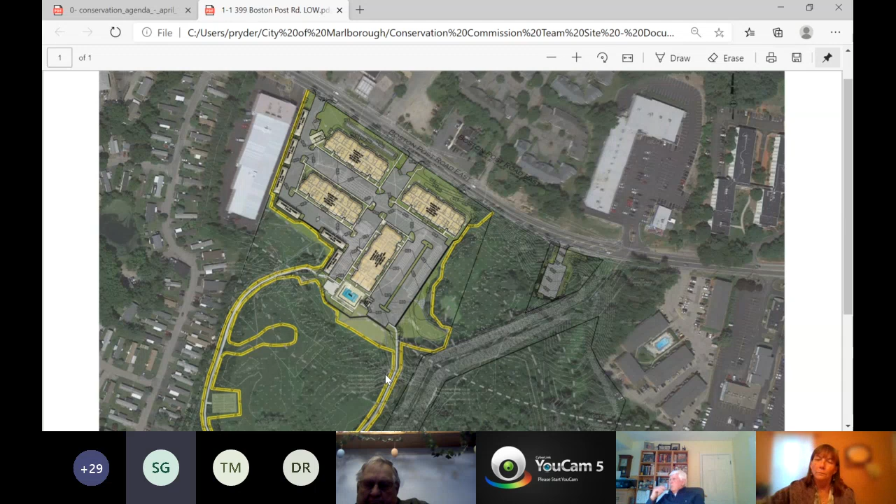What we've done for that ring, I'll just jump to that now because I want to keep this presentation brief. That ring is proposing to stay in place as a redevelopment of that pathway. It's currently about 8 to 10 feet wide, and we're proposing to take that portion of the project, classify it as riverfront area redevelopment, narrow the width to 5 feet wide so that we're taking the total impacted degraded surface of that cart path and narrowing it to 5 feet wide, paving it for pedestrian access, and then revegetating the shoulders so that we're having a reduction in overall degraded surface in the riverfront area, both the inner and outer riparian zone.

The balance of the project under the riverfront area standards is being classified as new development. The reason we're doing it that way is to take advantage of the opportunity the regulations allow for 10% maximum alteration of the riverfront area.

Currently, there are portions of the site that are degraded and previously developed. We measured just shy of 1 acre of the site of McGee Farm that has graveled paddocks, parking areas, buildings, etc., that are not vegetated and don't have natural soil on them. We're not counting the existing paddocks as degraded, although we're recognizing that they are utilized in a non-natural way as paddocks, but those don't count toward the previously degraded area.

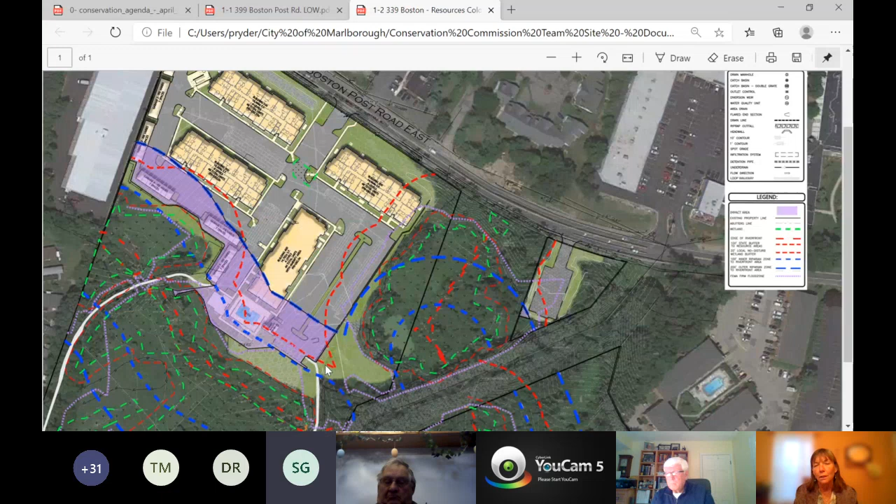This is Priscilla, and my comment is simply that, for anybody who's listening, when you're filling in the wetland here, it's kind of like if you fill up the bathtub, you have to create an equal or larger bathtub so that water can flow into it. So that's what's being proposed.

The other thing I wanted to note was that the engineering department and I are still reviewing those calculations, and we haven't finalized that review yet. So we'll report at the next meeting.

Okay, and a little thing about the replication area. The replication area is over on the other side of the track. And I think it's 7,287 square feet.

What's the loss of wetland area? Well, the only loss is the isolated wetland, not any BVW, and it's a small number. Let me grab it - I want to say it's about 1,500 square feet, something like that.

It's down where the cursor is right now - I think that's where you're planning on putting it, right in there. It's actually a little bit higher. If you see, there's a little silt fence loop a little bit higher - you can see the little black silt fence there, right in the middle. So there's some access there, and then it's kind of in a pocket of wetlands.

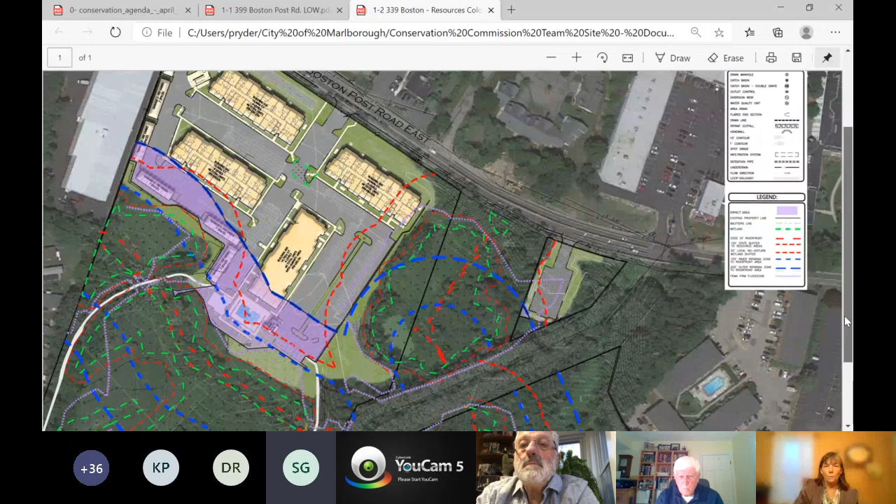Tell me where the bocce court area is. If Priscilla can point to it, it's just below the pool. Yep, right there. Could you point out on the map where the dog park would go? Priscilla would have to change the map, I think, to the one we had previously. Okay, I can do that, let me try.

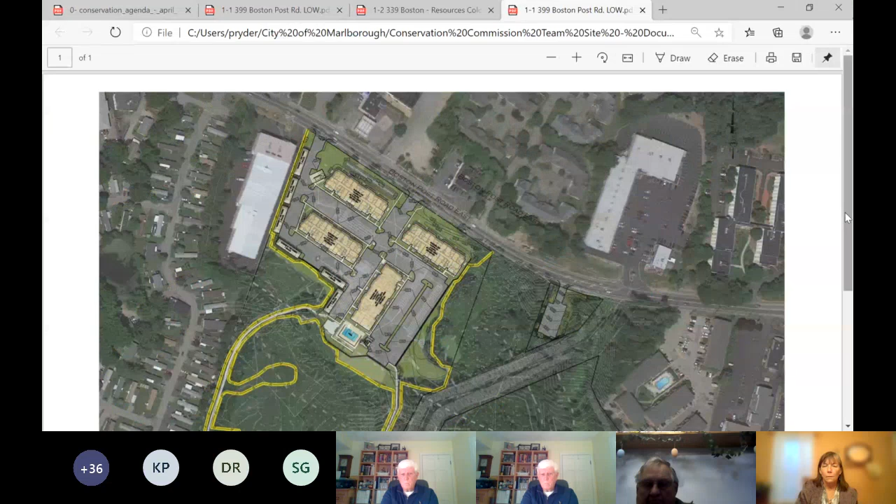All the way to the southwest corner, this is the dog park, that's correct. And this is the community garden. Correct. And while you have that up, the other little projection to the right is the wet replication area we were discussing earlier. Okay, I see it.

There is a concern about the dog park. Yeah, that's why I brought it up, the letter from the DCR. But I think they've addressed it because it's as far away from the stream as they possibly could get. That was their big concern. There is a wetland here, so we'll have to figure out what the distance is. They were trying to get it as far as 100 feet away from whatever the resource areas are. We'll have to, I'll read those comments in a bit too.

Okay, great. Thank you. Any other members of the commission? Yeah, I got one more to add into that dog activity. I'd like to also see a little bit more concentration and report back to the commission on the disposal of the dog waste, how they're going to take care of that situation. That's if it's allowed, Alan. That's okay. I mean, that's a good idea to give feedback.

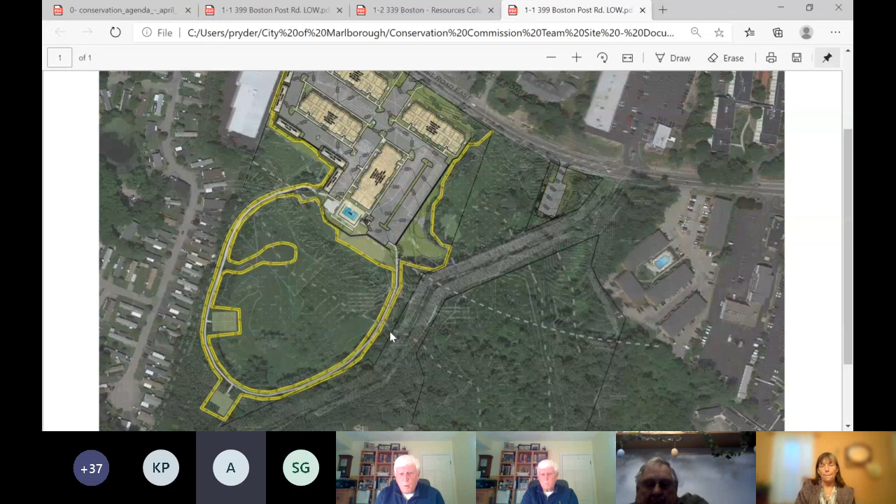Okay, any other members? Yes, Mr. Chairman, Dennis, go ahead. Yeah, I reiterate, like we had discussed before, that satellite parking area and access to it. I know they're counting on the state. He did say they may have to put their own sidewalk in, and what I found out, the state, I think they're lucky if they even get out there by 2022. So they're going to have to do something on their own to get to that parking area, or it ain't going to fly. And the same with the dog park area. It's kind of a negative thing, really, in my book, as far as I'm concerned.

Exactly, and again back to what Alan was talking about, he didn't really bring it up, he asked about a profile of that area, what's in there. Over the years, when they had operated as an animal farm, they buried a few cadavers in there. There were never horse cadavers, just to be clear. Well, not just horse, or animal, right? Animal cadavers, and there was never a selected point, it was just either here or there, about just where they keeled over. So there's going to be a lot of that in there.

Yeah, I agree Dennis, that's a very good point to be presented here tonight. Thank you. So that's about what I have to say, and I think it's overbuilding a small area, sticking a lot in a small hole. My comment. Thank you.

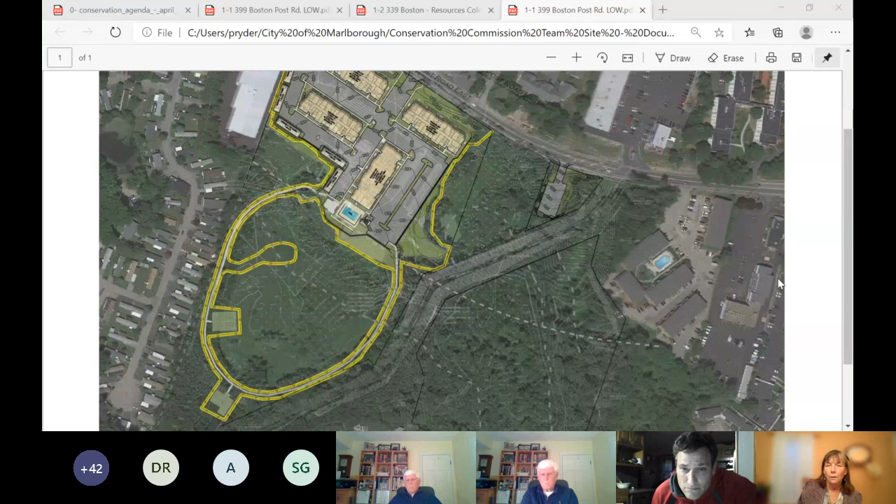I am abutter on Helen Drive. Priscilla, can you move the map up towards the bottom so we can see the back of the houses on Helen Drive, please? I'm going to see if this map shows that. It doesn't go that far, but here's Helen Drive, where my cursor is, and I think you guys are down, I don't know if you're this corner or down a little bit further. I'm down a little further from where you are pointing.

However, I want to make sure the commission remembers that Meadowbrook is a stormwater run, and that any change in the floodplain is going to flood a number of backyards on Helen Drive.

Okay, and I think one of the things we have to look at is they're supposed to be providing some compensation so that water can't go flying through, that it has to stay in the flood zone. But that's a good point, and we will take it into consideration.

As we go, because since the surveyors have been out there, we've gotten into the wet season, and now a lot of that land back there is now marsh, which they wouldn't have seen when they were walking through earlier because it was frozen ground.

Correct. And if you'll notice where the flags are is probably the extent of the water. It might be a little higher because we've had a lot of rain, but the edge of the wetland is usually the extent of flooding in some cases.

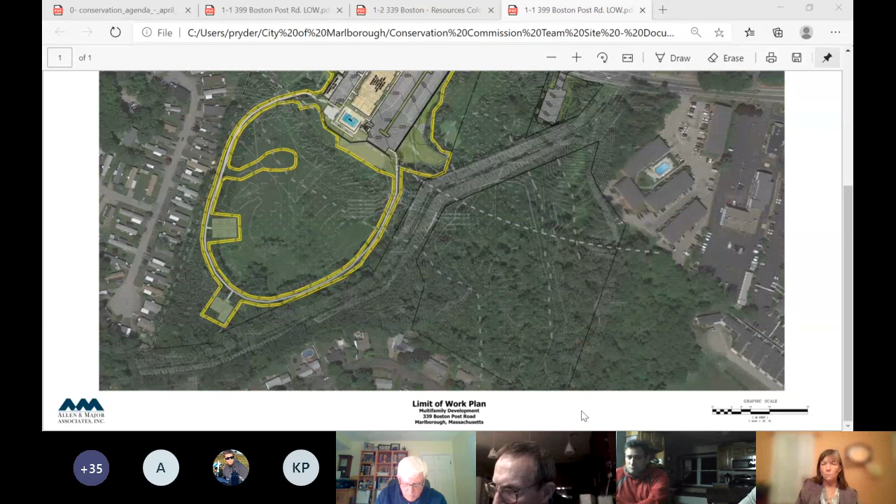Okay, going on to the next item on the agenda. This is a notice of intent for a continuation of a public hearing: McGuire Goddard Consulting, Red Spring Road, James Moran, Libby Levinson, proposing to replace the existing single-family home and upgrade the septic system next to Fort Meadow Reservoir.

Okay, who's here to speak on that? Who's here to speak on Red Spring Road?

Hi, I'm Jim, Jim Moran. Hi, Jim. Okay, so Jim, we're getting a lot of feedback.

So if you're on, are you on a phone or on the computer? I'm trying to be on both. Okay, then you have to mute your computer so we can hear you on the phone. It's feeding back, Jim. Yeah, I'll shut down the computer. You don't have to do that, you don't have to shut it down, you can just mute it.

Can you hear me, Priscilla? That's good, nice and clear. Thank you, all right, sorry about that.

Jim, why don't you go ahead and make the presentation, and I can point at whatever you need. Priscilla, I don't see the screen, the plan doesn't show a map on mine. It doesn't show? Okay, hold on, I have to do this in step 2. I have to close it and open it again. There you go, okay.

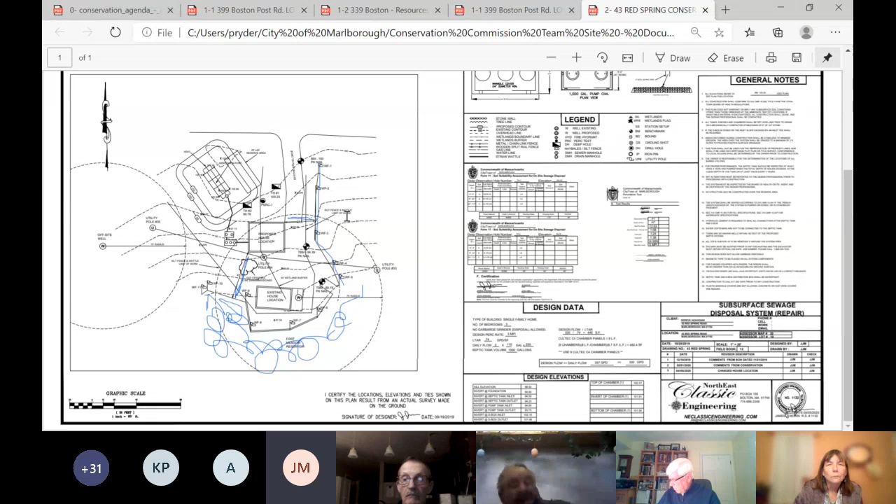If you look at it from the street, the far right side of the home, you got elevation 98. So the top of sill is 98.5. So you're going to sit 6 inches out of the grade there, and then you come in the back. That's not, the 98.5 is not on our plans. We don't have any solid floor elevation, top of concrete, nothing. We don't have that on our plan.

Jim, can you see the plan that I'm showing on the screen? Yeah, maybe. You have a different plan? Because if you have a better plan, then that's what we're looking for. No, I don't. It's not there. I know, between talking to the home designer and all that, I knew where the elevations had to be. I didn't know that the conservation wanted to see them.

So yeah, I think we want to see a plan that's similar to what you would give to the building department, and there's probably some fine grades around the edge, so if there are some grades you have to chase to make things smoother, that's what we want to see too, just because we want to see how much work you have to do. Right, the idea was to use the foundation and just grade into the foundation those existing contours. Okay, you're trying to get out of doing some work.

You've got to do a plot plan that you're going to submit for a permit, not for a septic. You've got a plan for a septic permit now. We want a plan for a house permit that we see. I will ask the building department what they need as far as a plan goes, and I'll make sure we have that. Yep, that's a good idea, that's usually what we do, so that would be great. I'm looking at the plan that we have, and it's a septic plan.

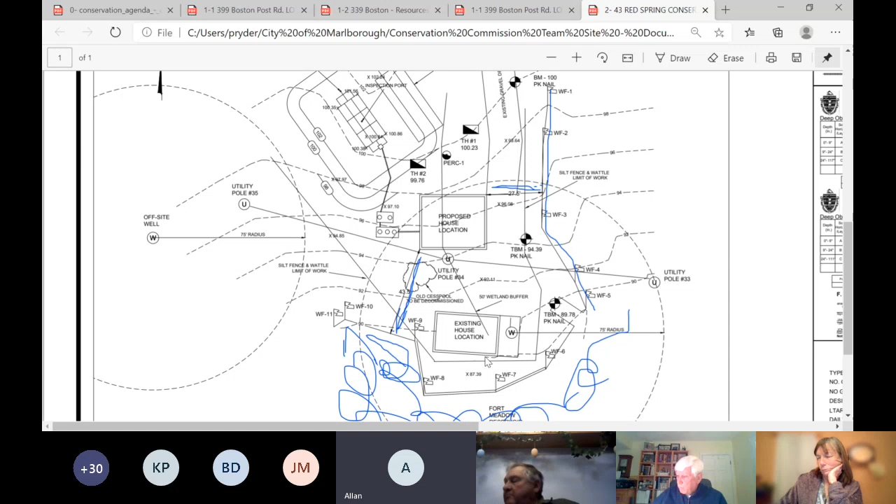I'd like to speak and pick up where Dennis left off with the well situation. Isn't it a requirement before you can have an occupancy permit, even before the house is constructed, to have a certified water supply, such as a certified well approved for the occupancy permit, or connect to the municipal water supply? Isn't that the procedure? Yes, that's what I was talking about earlier. Even to get your building permit, you need a means of water and sewer, and it's got to be an attested well or connection point to the municipal water supply before the building department will even issue a building permit.

And then they usually retest the well.

As far as I'm concerned, and the rest of the board, at this particular time we're going to have to wait until all of those reports are in before us before we could make a decision for you.

It could be contingent for the building permit. We can develop an order of conditions, Alan, and there could be a contingency before the building permit is issued.

Correct. Anyone else?

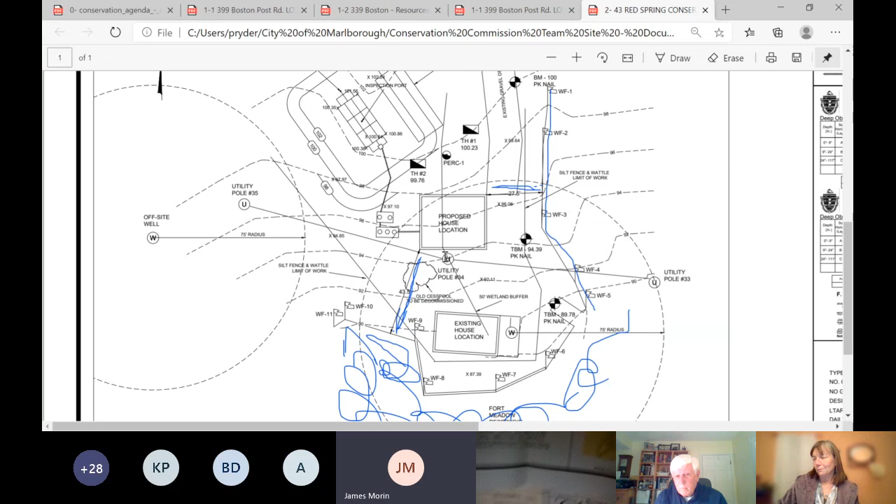Well, there's one other thing. This is out of our purview, but looking at this, it looks like there's going to be a telephone pole about two steps out the front door. What's going to happen with that? The long-term plan is to work with National Grid - they did a crazy cross-country run many years ago through that property. The idea would be to install 2 new poles at the road's edge and walk the wire from utility pole 33 up to the front over to utility pole 35.

That'd be something that should be included on the plot plan, submitted to us for approval. It wasn't due to financial considerations here, and it wasn't going to be done right away. It was going to be a long-term plan where the property owner would come back to do that.

So the good thing, Jim, would be to put that on the plan. The permit's good for 3 years. It could be a condition that continues or something. That might be a good idea. Okay, since you're kind of crossing the wetland there and you're close.

One more question I can ask on that. When you're referring to property owner or homeowner - is it one and the same? There is a home there, but it's not habitable. What I'm trying to say is, the landowner is the Morse Family Trust. I mean, are they the ones who are going to relocate the pole, or is the homeowner?

The homeowner would. Everything is borne by the homeowner on this project. As you said, they lease the land, so all improvements are supervised by the landowner and paid by the homeowner.

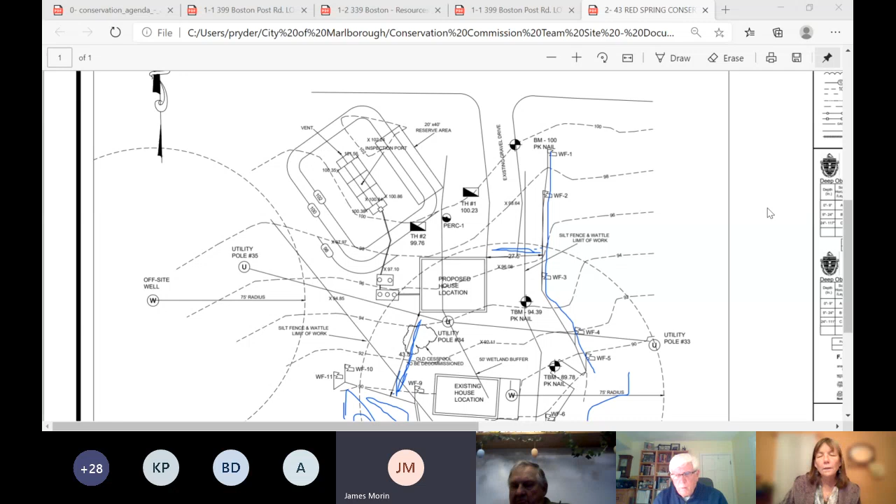And then the last thing is the grading when you're taking out the old building — the grading that will be at the end, so what that final grade will look like after that building's gone.

Hey Jim, just another point — when it goes along, all you have is a square box for the house location. If you're going to have any decks on the front, side, or back, those should be shown on the plan.

Okay, yeah, I think there's a deck on the second story which doesn't touch the ground — do you still want to see that? Not necessarily, if it's a cantilever deck or something like that. I'll take another look at the plan, but I'll show all decks with the grading, anything that touches the ground.

Okay, and I don't know if there's any public out there interested in making comment on this one. I'm just scanning the list to see if there's anybody not part of this. If you're interested in making a comment, you can unmute yourself, but there doesn't seem to be anybody unmuted, so I think we're good for right now.

Can I say one more thing? Sure. I apologize, Dennis — the driveway, you're going to show it. It's presently unpaved. In this plan, are you going to show it as unpaved? And if there's any intent to ever pave this, we have to know, because it comes down to watershed, non-pervious surface.

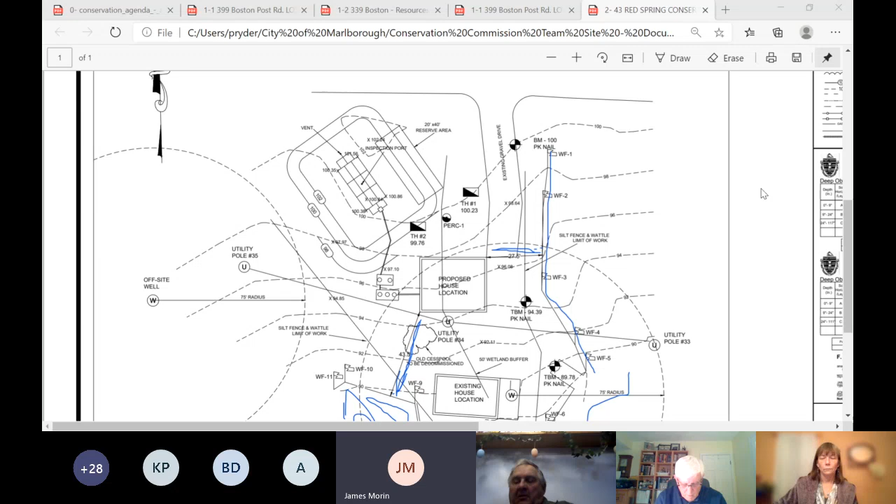Yes, I agree, I believe the intent is to leave the existing gravel driveway just the way it is, even in the future. That's fine, it's just that you note that on the plan. So I'll note this is to be used currently and in the future, and if it was to change, I'll note that they'll have to come back before the commission to even pave it.

Correct. I don't think there's an ounce of pavement off of Red Spring Road down there. Not that there is, yeah, no. There is, Billy Peters'. Oh yeah, that's right. Yeah, I know, I stand corrected. Thank you very much. I'm not trying to... okay.

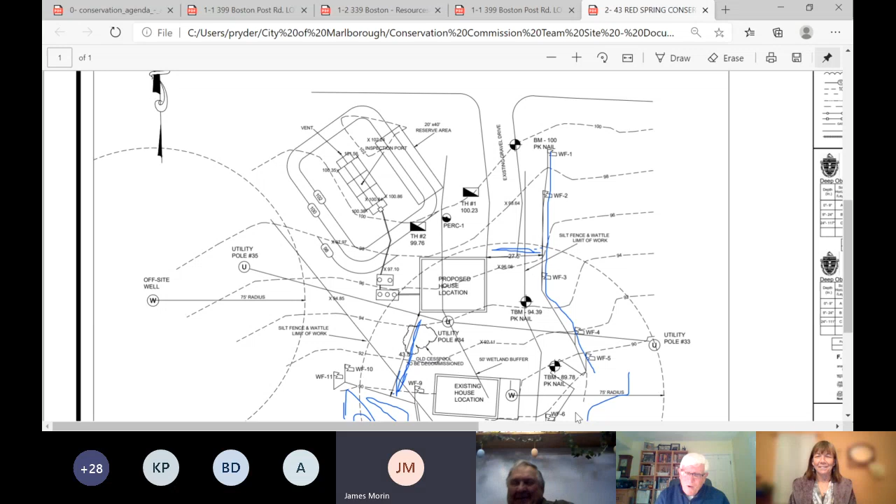Is there any other questions, members of the board? Okay, we're going to continue this to what date? Either May 7th or the 21st, Jim. I'll take the May 7th. Okay, yes, we'll put you back on for May 7th.

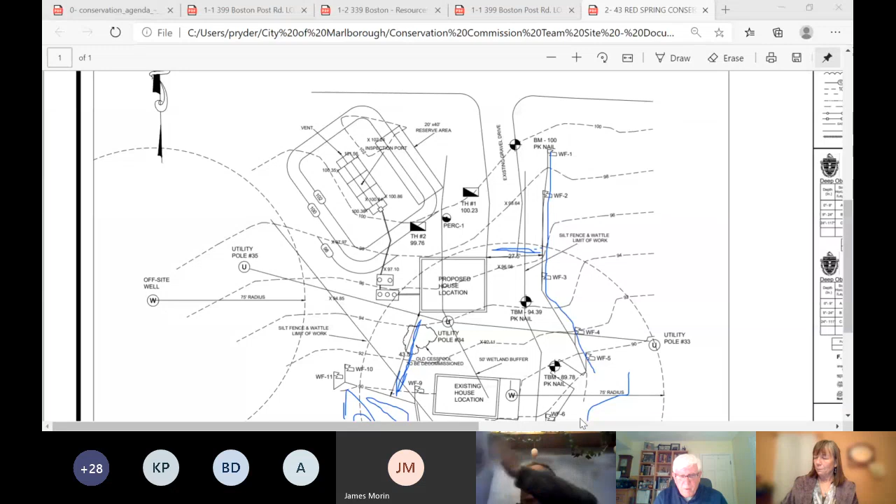So somebody out there requesting a continuance? Dennis, yes, I request a continuance. Okay, second. Motion made and seconded, call the roll.

Ed Clancy, yes. John Scarron, yes. Karen Paquin, yes. Dennis Demers, yes. William Dunbar, yes. David Williams, yes. Alan White, yes. Very good.

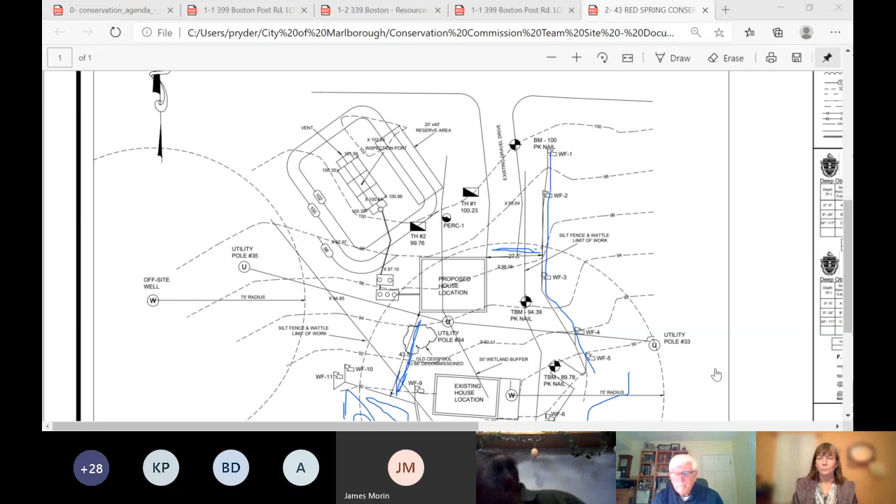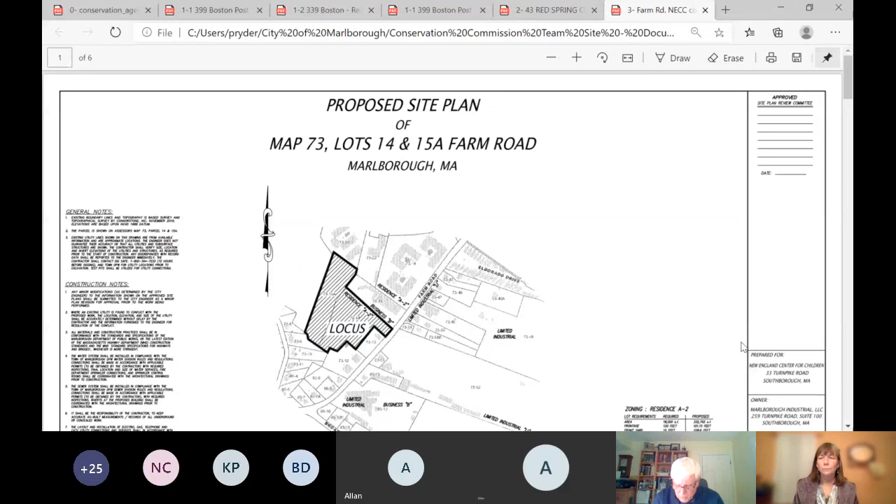Open the next hearing. This item on the agenda is a notice of intent for Farm Road, map 73, parcel 14 and 15A. Michael Downey, New England Center for Children Incorporated. The proposal is to construct a residential school building for the New England Center for Children with a footprint of 13,250 square feet. The proposal includes parking, drainage, and utilities as well. Some of the work is proposed within the buffer zone, to a wetland across the street from the old airport.

Is there anyone here to speak in the matter? Yes, this is Vito Colonna with Connorstone Engineering. Good evening. Please state what your project is.

I'm on the phone right now. The video wasn't quite working for me, so I think I can still do this. I should know enough of the plans. Right now, what it shows is the plan. It shows the plan, right?

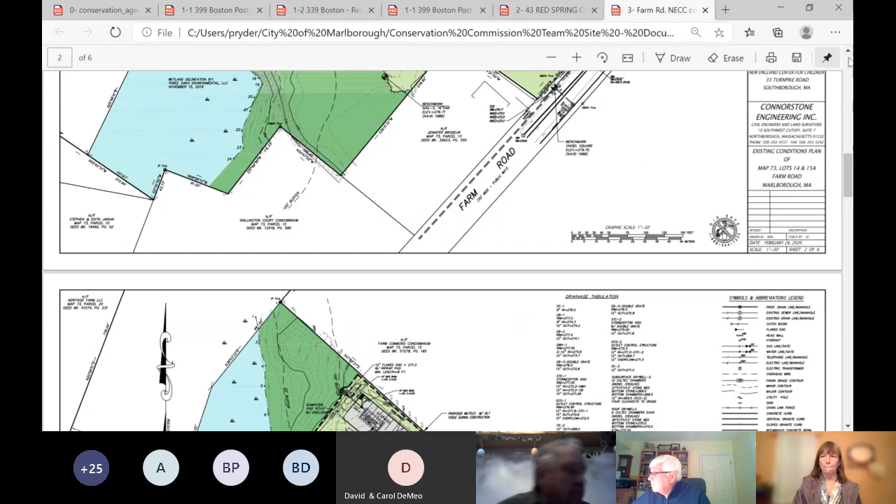Okay, so you want me to start going in, go over the project for everybody? Yeah, okay, go right ahead. Just want to see what's on the screen right now for everybody. Is that the existing conditions plan, is that what you want, Vito? I think it's sheet 2 in our set. Okay, yep, we can do that. Okay. All right, okay, all right.

So the existing site right now is 7.6 acres, and it's a vacant lot. It's right across the street from the old airport, where they're building that commercial development right now. So right now, the upper portion of the site is basically a field. That's that lighter green area shown. And then the rear.

Okay, so we're getting feedback from you. Do you have two items that are giving us voice? Are you on the phone too? That was Bill. Somebody named... oh, Bill, I just muted him. Okay, thanks. Yep, I just have the phone going.

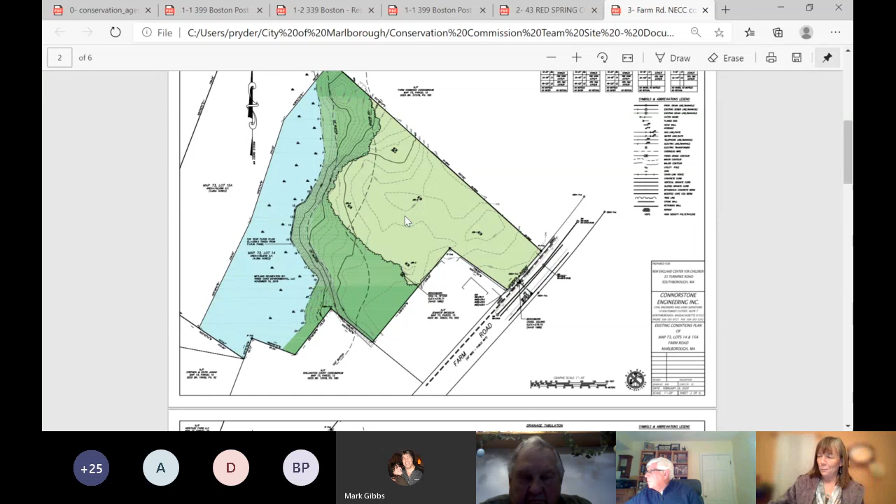Okay, go ahead. And then beyond the field, it's a fringe, kind of the wooded area in the back. It's that darker green area shown on the plan. And then it drops down approximately 10 feet in elevation down to the wetland in the rear. The wetland is fairly flat out there. It's clearly defined by the toe of slope. There is a floodplain associated with the wetland also, and the FEMA mapping shows that it basically correlates with that toe of slope. So we've shown all that on the plan right now.

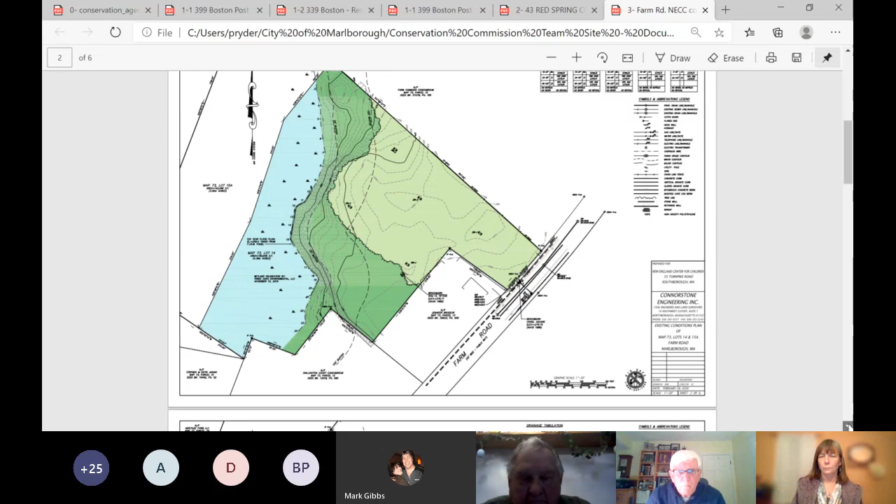So the upper portion, though, is fairly flat, and that's kind of where we're proposing most of the development, trying to keep mostly out of the buffer and in that previously cleared field area. If you want to switch to the next site plan sheet, which is sheet 3, you can kind of go through the site plan. Okay, there you go.

All right, okay. So the proposed building, it's that T shape in the middle, and it's proposed housing for New England Center for Children. It's a 27-bed facility, so there'll be 27 kids there, and then there's also a one-to-one staff at peak times. So we proposed the building set back a little bit, with access off Farm Road with proposed parking. There's a turnaround area for deliveries and emergency vehicles to get in and out of the site. To the rear of the building, inside each of those T areas, is a play area for the kids. So it's a fenced-in play area with a walkway around the edge of it.

Overall, the building footprint is about 13,000 square feet. The actual gross floor area is 25,000 square feet. So it's one story on the two wings of the T, and then that center portion would be two stories with a basement also below. So that's where we get the 25,000 square feet.

So the development itself does extend into the buffer zone to the rear. We've tried to keep the development up on top of the slope, and we've maintained everything outside the inner buffer zone, inside that 25-foot buffer. The actual disturbance of the buffer zone is about 22,000 square feet, and a good amount of that area is already cleared and is a field today.

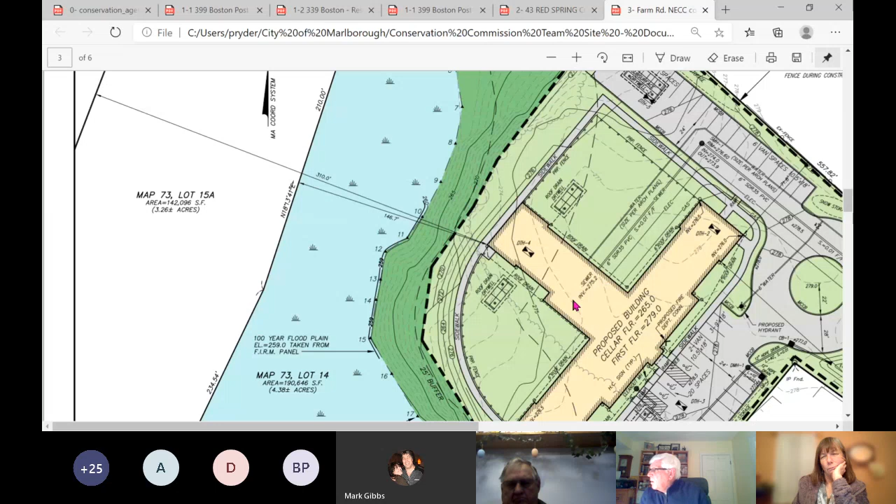I'm just concerned about if you hit groundwater, how do you handle it? If they did hit it - I mean, it's a pretty large site - if they do encounter it during construction, they'd have to do some dewatering, obviously. You'd have to prepare a dewatering plan. Typically you'd have to get that in. I don't anticipate them needing it.

Like I say, we should be a few feet above groundwater still. The wetlands are at 259, 260, where the cellar floor is at 265. So that does give you a little bit of play in there. And our test pits went down to 263, 262 in that area, and we had no groundwater.

I noticed that you have a sidewalk going around the site, on the wetland side. What's the width of the sidewalk? I think that's a 5 foot. Let me just double check on that. Yeah, that is a 5 foot walk.

Now, the reason I ask this, if you encounter something with the fire department asking for access around the building, you're right at the edge of the slope there. I might anticipate the possibility of the fire department wanting a wider area, just in case they had to get an emergency vehicle around the building. Understand what I'm saying?

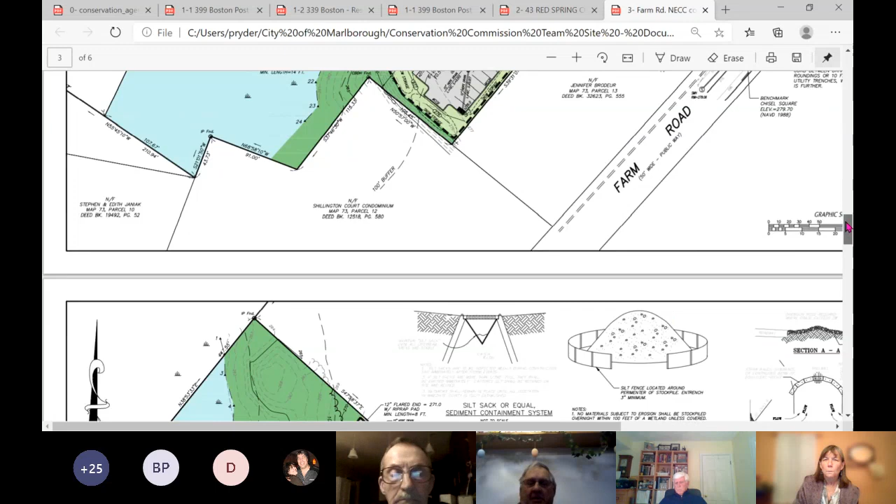I know you were talking, is the fence going to be along the back side of this, so we don't have any people swimming that aren't supposed to? Yeah, that's a concern always with the kids.

So those rear play areas where the kids spend some time outside, we did have a fence around that area that would prevent them from getting out. And then on the side and in the front where they load and unload when getting into the vans to go to school every day, we have fencing there, on those two locations also.

So they obviously kind of think that out when they're planning these facilities, as the safety of the kids is kind of the most important thing. Anyone else? Any other members of the board?

Yeah, question, this is Bill. A question for perhaps Alan or Dennis. Was this a fill area? Was this an emergency extension for the airport? Did they come in and fill this area at one point in time?

Well, I could speak to the test pits. We did test pits out there, in the front and in the side and the back. We did 5 of them kind of spread out. There was some fill placed in one of the holes we found, deep test hole 4, which is kind of in the back corner. The rest of them, although, were native soil when we went down. And the fill in that last hole we encountered was only a foot of fill, so there wasn't much placed in that one location.

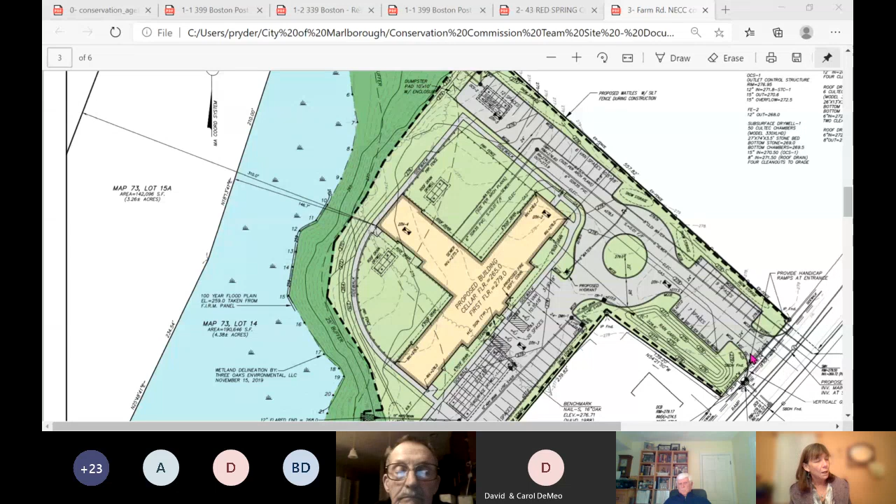I am working remotely from home, but can be reached by cell phone or through email. Thank you for taking this into consideration at your hearing tonight.

So I think it sounds like their drainage has met that. I will get something in writing from Tom, but it sounds like they're putting it all back into the ground, which is the best way to do it, and that'll alleviate flooding in the future too. So those are all good practices to be using.

This still has to be reviewed by engineering. Correct, and they are in the process of reviewing that, and I think we're waiting for them to just finalize their drainage calculation review. But so we'll continue.

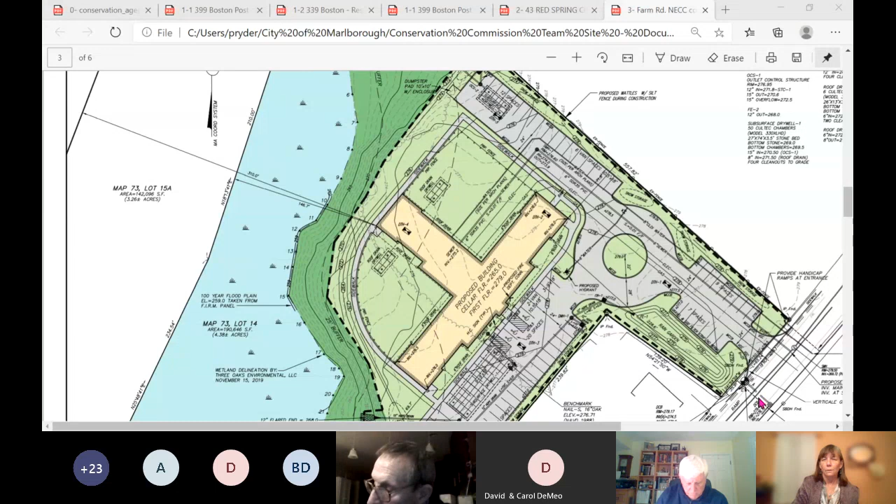Is there anyone else who wishes to be heard that's out there remotely? Okay, so we want to continue this to what date? The 7th or the 21st. We prefer the 7th if we could have that, please.

Okay, Bill. Bill, that was Bill Pezzoni. So they're going to say the 7th. It's going to be a busy 7th. It will be a busy 7th. Okay, it's also a busy 16th as well. Yeah, it is.

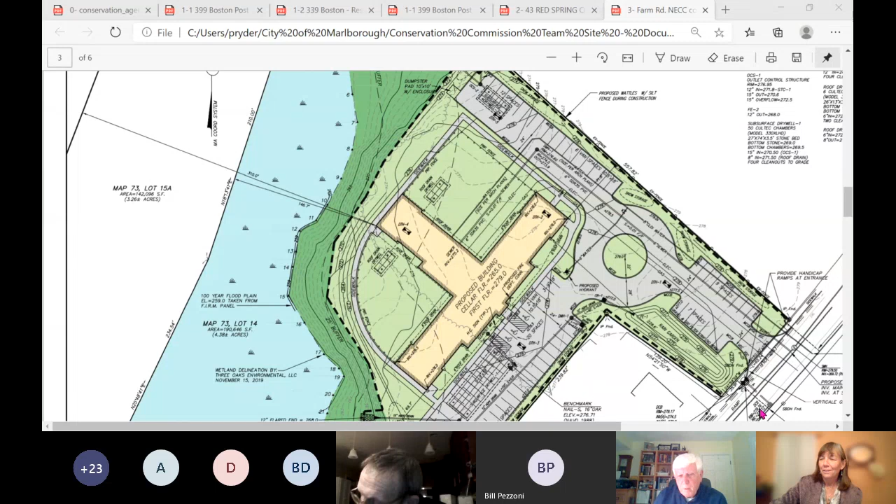It's already 9:04, just for the record. Okay, so we can entertain a motion for a continuance. Entertain a motion for the continuance. Okay, thank you, Alan. That's made and seconded.

All in favor: Ed Clancy, yes. John Scarron, yes. Karen Paquin, yes. Dennis Demers lost his computer connection. He just called me on the phone to tell me, so he won't be responding. William Dunbar, yes. Dave Williams, yes. Alan White, yes. Okay, so this is continued to the 7th of May.

Thank you very much. Thank you. All right, thank you. Thank you. Nice hearing from you, Bill. Okay. Yeah, how are you doing, Eddie? Okay, I'm doing fine. Multiple people are now exiting.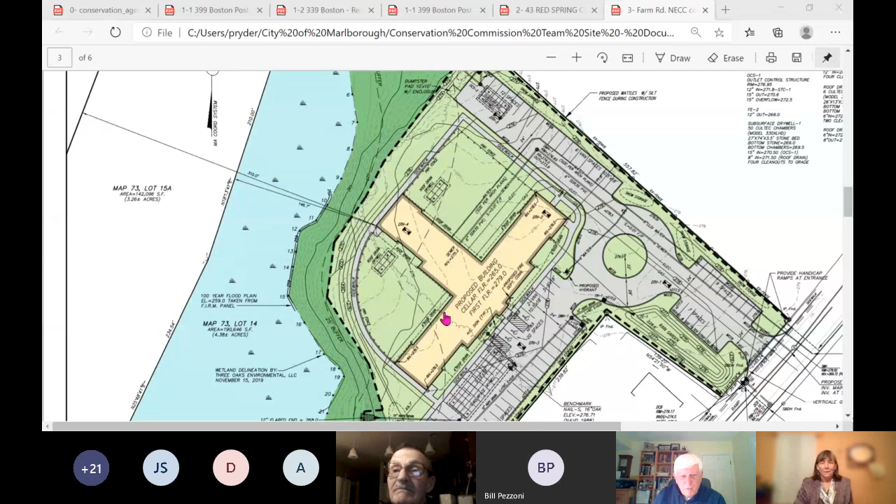Okay, here's what I'm gonna do. Next item on the agenda is a notice of intent for Roosevelt Street. This is map 55, parcel 50, Carlos Marcolino. Proposal to construct a single-family home on a vacant lot, portions of which are proposed within the 100-foot buffer zone to bordering vegetated wetland and/or inland bank associated with an intermittent stream at the end of Roosevelt Street. Is there anyone here to speak in the matter?

Hello, can you guys hear me? Yes, I can. All right, great. For the record, my name is David Cowell. I'm a wetland scientist with Hancock Associates here tonight on behalf of the applicant. I want to thank the commission for being available to turn into virtual hearings.

This is great. We filed a notice of, before I go on, let me just say that we have two other members of our project team on the meeting tonight. Dan Brimser is the project manager, and he's a registered professional land surveyor. He's on the line and able to talk about the survey on the property. And we also have a civil engineer named Jacob Lemieux, who did the site design and the stormwater drainage. He's also in the hearing room tonight, and he can unmute and chime in to answer engineering questions.

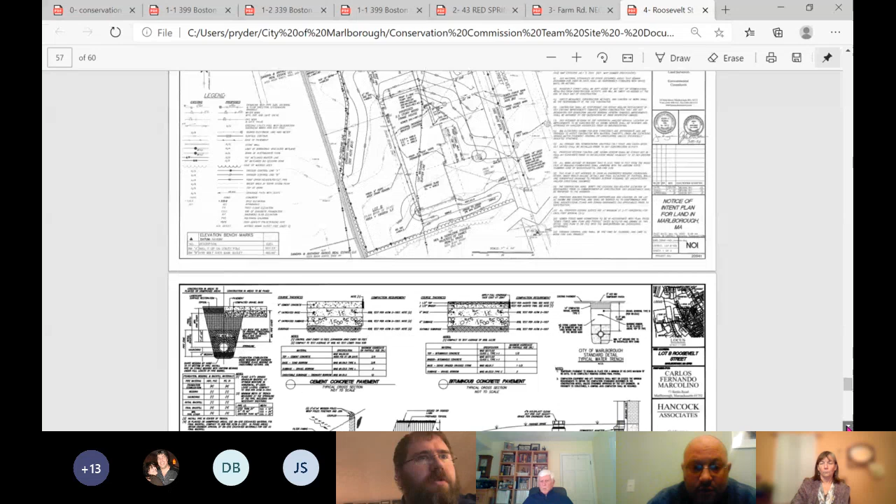Yeah, I think right now we're proposing silt fence. I'm not sure, hold on, let me check the second page of the plans here, we have details. I don't think that we did propose straw wattles as well, but that's certainly something that we can put in. Right now it's a silt fence barrier. I would recommend straw wattles too. Straw wattles.

Do you have a plan for a second house on that lot? If so, where would the pump station be? If you look in the front yard, there's a label on the top of the building that says Prop E1 pump unit.

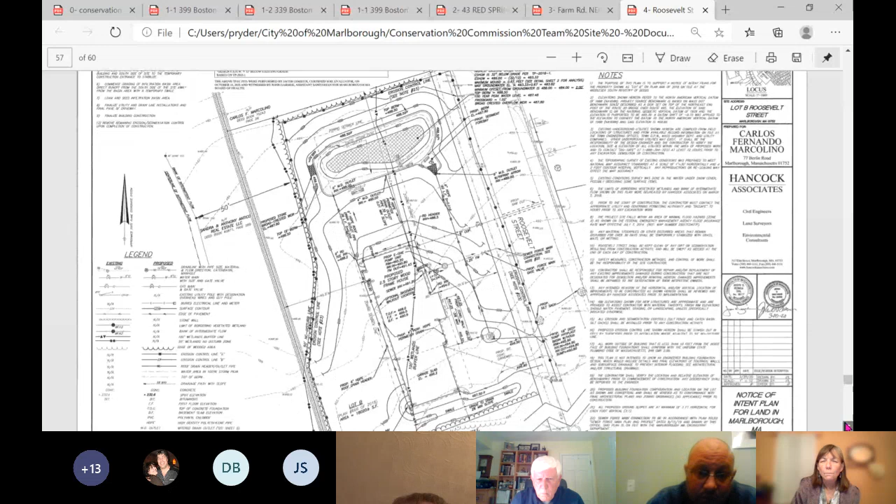There's a circle here, is it this? No, up further towards the top of the page. Right in here? Yes, the sewer will come out there, the single unit E1 pump station. We have details for those on the third sheet of this set, and that's where that round circle and label is.

Priscilla, remember the houses constructed down off of Hudson Street? Yeah, this is the same situation. But they had a chamber on it, a 500-gallon chamber. Yeah, that E1 pump unit has a chamber and a pump. So it's just an all-in-one pump chamber and pump unit.

Okay, now a question would be about failure. What would happen in a failure? Well, in a failure of the pump, like a power failure, they don't have power.

Is there a check valve going into the house? Yeah, there's a check valve going into the house, and there's a gate valve on the main line too. So if there's a power failure and these need to be repaired, the gate valve can be shut to isolate individual units.

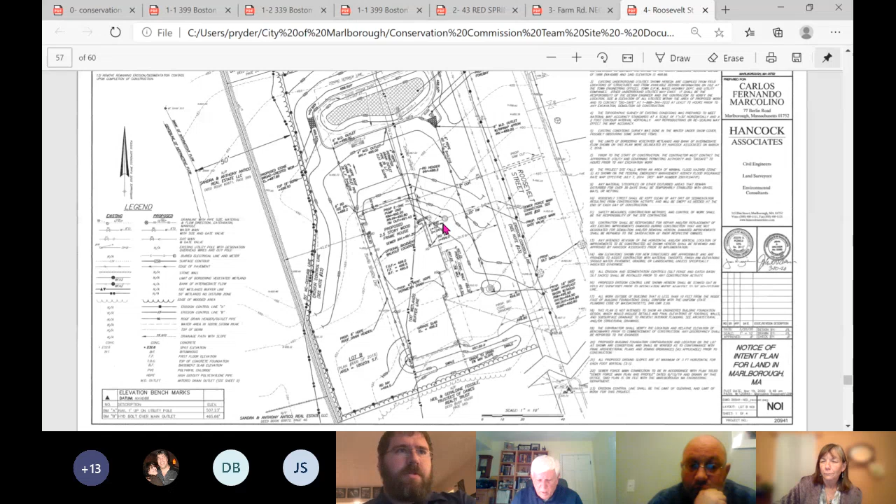My question is does the city really allow these? I encountered this question once before, and I didn't think they would allow them because they would have to go up the street. Who's going to maintain them in the street? Well, we're working with the plan with Tom DePercio and the engineering department, and this will become a public sewer line.

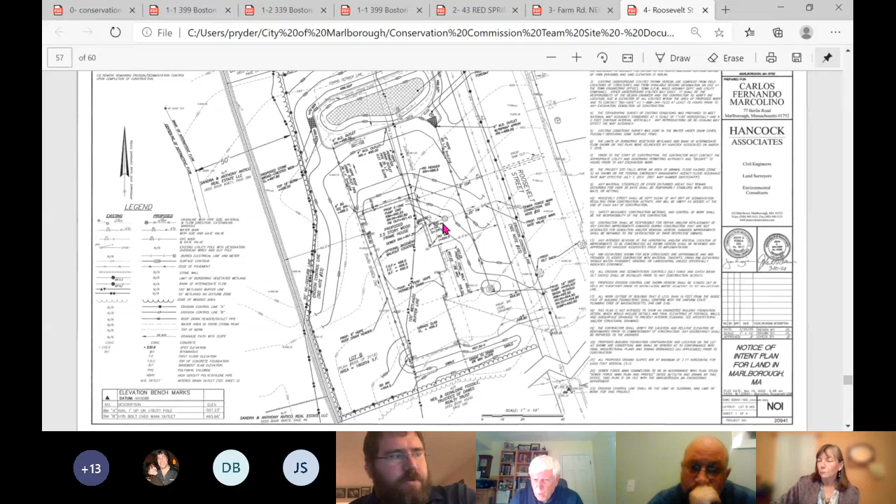That would become a public sewer line, so other people could hook in. Right, so the design for the actual sewer line itself includes laterals for the installation to deactivate or replace some of the failing septic systems that are also on the road, from the abutting lots and the lots across the street.

Yeah, this is something new. Usually what they do is put in a large pump station at the end of the street, then run a force main up the middle of the street, with gravity sewer down to it. But this is an unusual way to do it. I've never heard this one.

So I'm just concerned about the failure. Ed, this is Dan Bremster. I'm probably the same age as you, so that's the way I'm used to seeing sewer force mains too. Joe Pesnola was the one who made me aware of this type of system. I wasn't aware of the E1 system, and he worked with Jacob to put the design plan together.

And like we said, we've had it in for review with the engineering department. I think it's pretty much all set, but I think the last step is to get a contractor that's able to install it. Jacob might know more than I do about that, since it's been sitting for a little bit. So Jacob, is there anything new on that?

No, I think basically we're waiting to select a contractor who will then run it by the engineering department and get a road opening permit, since there's not really a path to permit this. It's kind of an unusual situation where it'll be turned into a public utility. So it'll be approved by the engineering department, and then we'll apply for a road opening permit upon submittal. They'll approve the plans based on granting that permit, which will allow us to install the force main in the street.

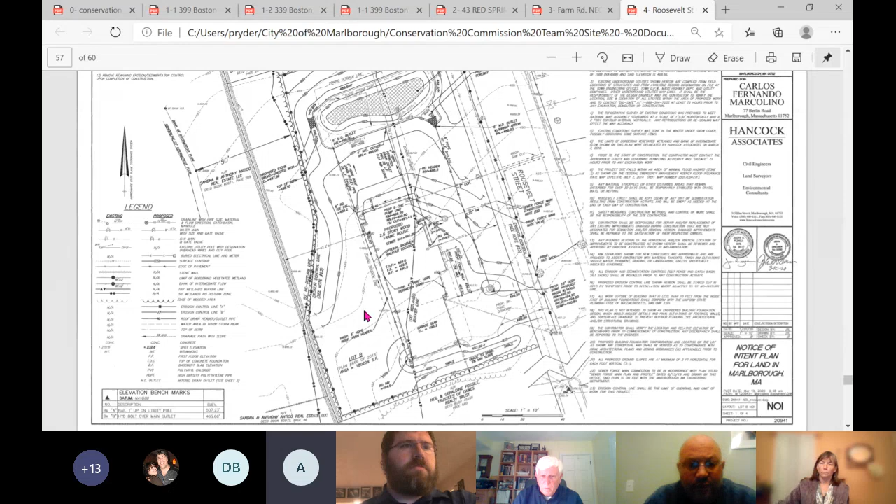This is Bill Dunbar. There are a ton of invasives on the property. When the clearing is done, is there any of the three of you that could explain how we will prevent the invasives from ending up scattered throughout nature to the north and west of the property?

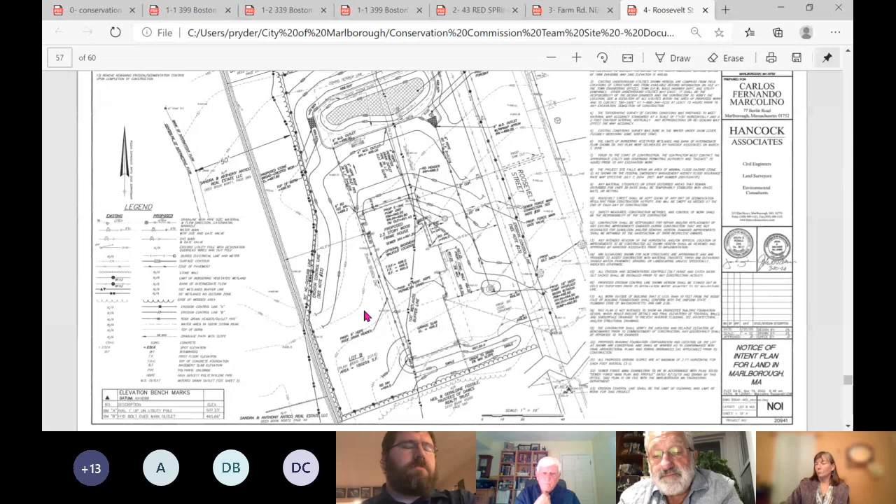The question is about the land clearing. Where's the material going from the land clearing? I imagine it would be either cut or chipped on site and trucked off site. You're talking about the woody material, or whatever cut comes out, like dirt? After my visit the other day, I am scarred from the rose thorns.

Multiflora rose. It's loaded, and I don't want those distributed throughout the neighborhood. I would like them chopped as finely as possible and taken off the site. Yes, that's a clear question. I know those multiflora rose well from being out there delineating and giving some blood. Multiflora rose, it's an invasive species.

I would recommend that throughout the entire property, not only our area of clearing but also some of the area left undisturbed, we could offer as mitigation wholesale treatment of invasive species. Multiflora rose is the most prominent one, but there's also species of honeysuckle throughout that area, quite a few. We can incorporate that. And some vines, the Asiatic bittersweet - yes, bittersweet. We can add that. We can take a list of any invasives on site, except for garlic mustard - that's a tough one to eradicate, but we can work on anything but garlic mustard.

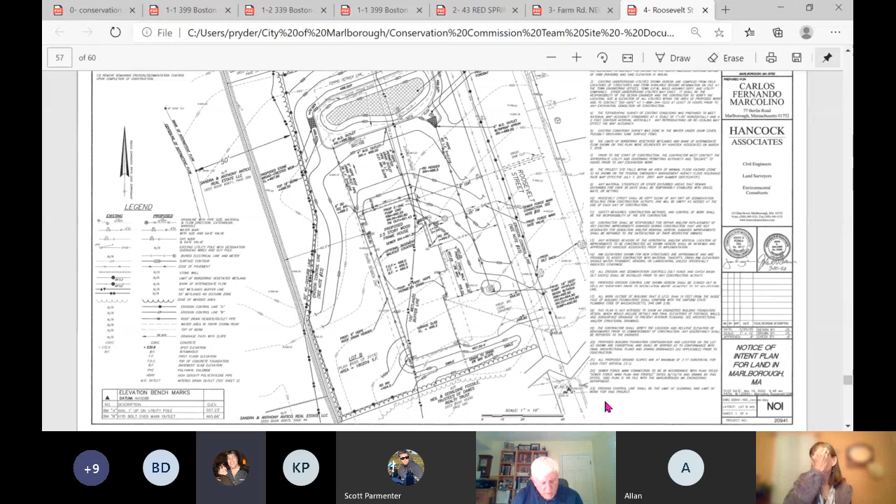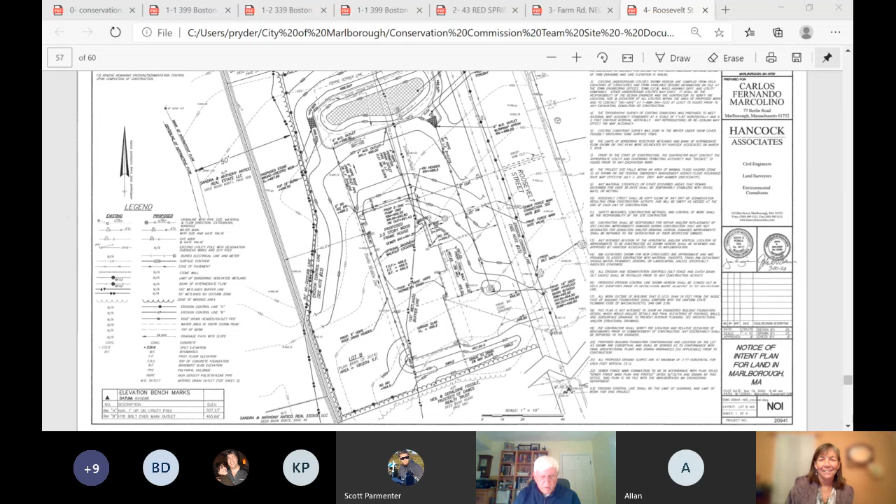Next item we had is supposed to be a draft order of conditions for the Marlborough DPW for Poria Drive. They're not ready. That's perfectly all right. Trying to put these programs together is far more demanding than putting on a regular meeting.

Thanks for understanding. Next item on the agenda is the signatures for the Conservation Commission. This is under discussion, yes.

So I made a proposal here, oh, and I missed comments for Roosevelt Street. I'll read them in next time. I'm sorry if Peggy's still on, I'm sorry I missed you.

And this next thing, just as a procedural matter. In this whole COVID-19 world, DEP has been trying to figure out how we get things signed if people are not together, and what is necessary. So DEP is allowing electronic signatures, but the Registry of Deeds will not. The Registry of Deeds requires that the signature, either one or many, on the order of conditions, be in ink.

So to resolve this with the Registry of Motor Vehicles, Registry of Deeds, the state has recommended that we do this vote authorizing signature of commissioners.